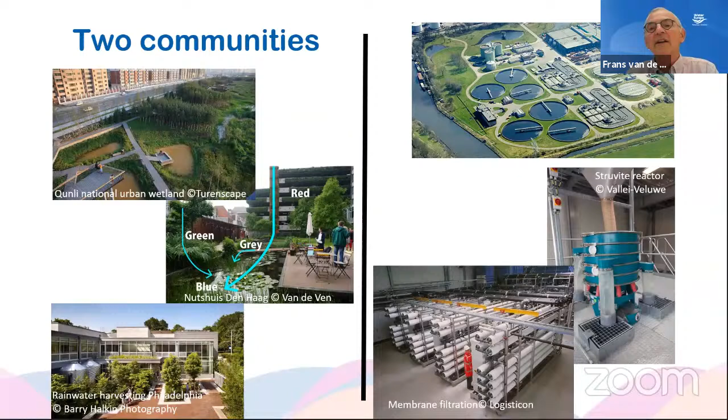The green people are working in the city, greening the city and making lively environments. The water technologists are working in water factories far away from the city; no one knows what happens there. It's behind a fence, well protected, and that characterizes the two communities. One is led by landscape architects, etc. They work in the city with very visible, decentral, multifunctional, opportunistic solutions, whereas the engineer tries to optimize the performance of each solution. Facilities invisible behind gates, often monofunctional, cleaning wastewater, producing a specific type of wastewater if possible.

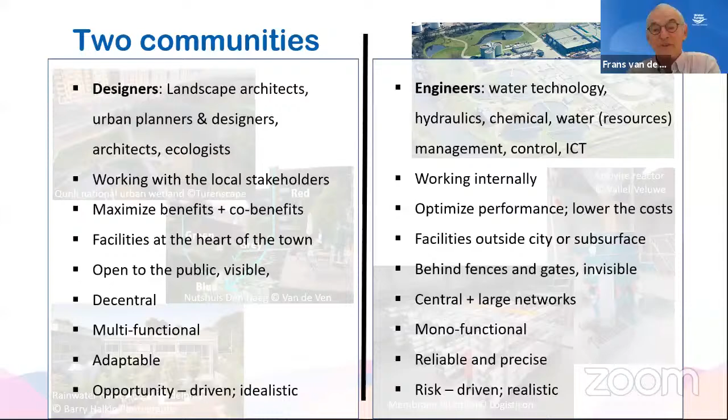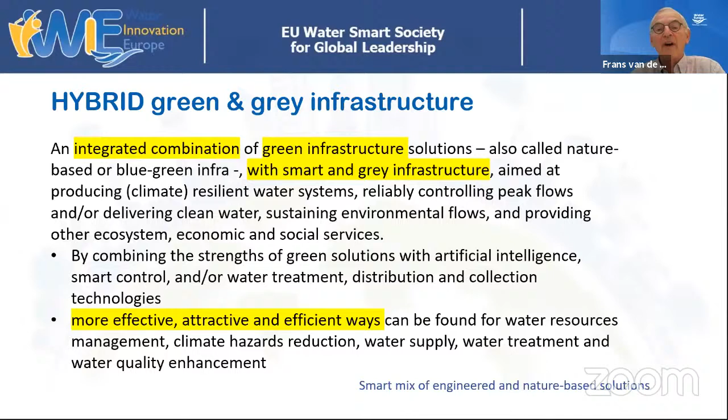Two different communities, and we think that the world could benefit from an integration of these two, an integration of green infrastructure with gray infrastructure, with the gray water technology solutions, but also with the water smart solutions, as is the topic of this Water Innovation Europe theme, Water Smart Society. All this to define a more effective, attractive, and efficient way to deal with our water resources and to provide services to our community and to the ecology.

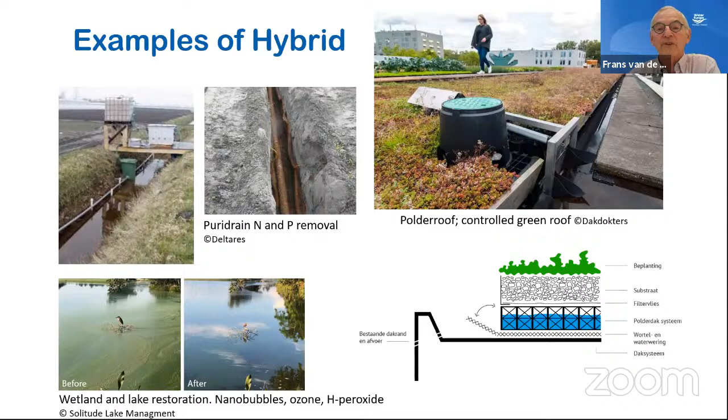And a couple of hybrid solutions, and we'll see more of that. The Puridrain, the upper left corner, Stefan Janssen is going to talk about that. But okay, we will see more examples in the presentations. And our conclusion of the white paper was, well, we can do better. We can do better by optimizing the synergy between nature-based solutions, water technology, artificial intelligence, monitoring, control technique, and integrate that in one solution, rather than doing treatment trains. Even try to integrate that in one solution.

However, this requires new roles for the existing players, for the utilities, for the water authorities, for all the others involved, for the spatial planners. It also requires learning by doing, because we have to experiment and learn a lot from innovative solutions. It also requires new governance, new spatial arrangements. And to that end, it requires targeted research and development, targeted R&D, and that needs money, of course.

If you want to talk about how to achieve this, well, we identified this according to the Symbiosis readiness level. Many people know the technology readiness level, but there's also a Symbiosis readiness level that identifies 4 characteristics, and that is technology, or the ecosystem, the network of cooperating organizations, the management, and the business character of the solution.

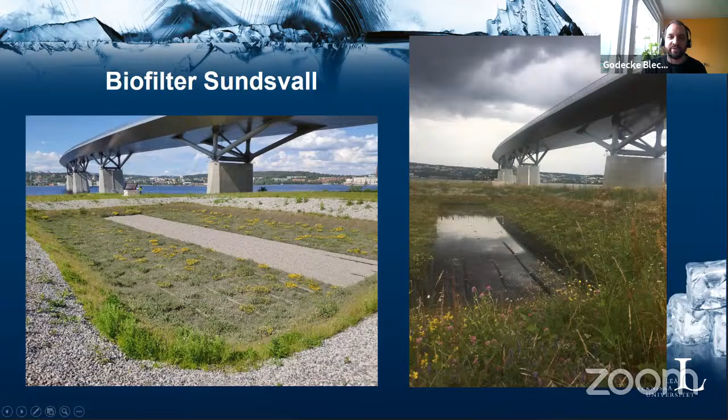And the runoff from this bridge deck is treated in this bioretention facility. As a first pre-treatment step in this facility, we also have a concrete pre-sedimentation facility. This is how the facility looks during dry weather, and during wet weather you see that there's water standing there, and the water infiltrates through the system and is treated by different processes in the filter material. And as I said, before it reaches this system, it passes through the pre-treatment facility, which is this gross pollutant trap.

And the design was done by our university together with this Mid-Sweden Water company, with Sundsvall municipality, and with the National Swedish Road Agency, who's responsible for all national roads in Sweden. So that was done jointly. So this is a quite good example of a collaboration project where we from academia already came in early in the design process to gain as much as possible from the system and to use the opportunities which these systems provide.

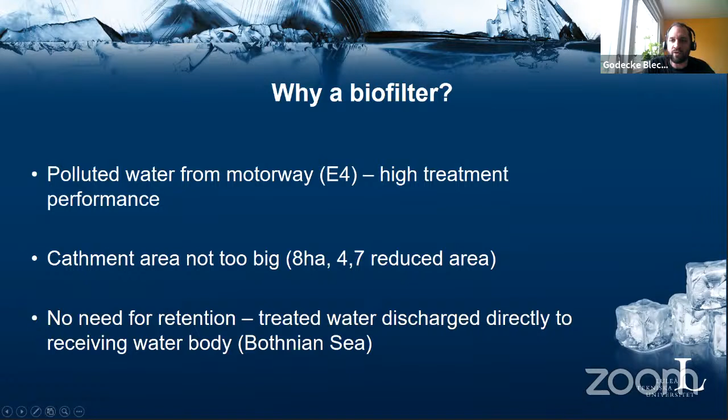Why this facility? The polluted water from this motorway has to be treated before it's discharged to the receiving water body, which is a bay of the Bothnian Sea, so the northern part of the Baltic Sea. There was no need for retention of high flows or flood protection, so it was mainly the water treatment, because the water from the bridge does not contribute to high flows or flood risks downstream, because it goes directly to the sea there. And the catchment is about 8 hectares, and it's 4.7 hectares impervious area, and that is mainly the road area and a motorway exit.

In total, the system was quite expensive. That was nearly 1 million euro. However, that was not due to the system only. It was also because the soil on site was a contaminated soil. So some measures had to be done, and that was a major share of this total cost. So that's why this is really expensive. But the system itself was cheaper. But this is one of the slides which Anna Maria was supposed to present. I cannot tell you exactly how much the system itself was.

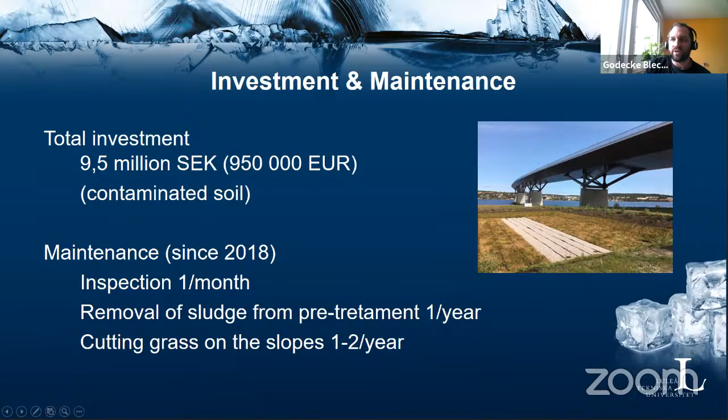The system was financed by the Swedish Road Agency when they built the bridge, because they own and operate the bridge. But then they have a contract with this Mid-Sweden Water company, and they are responsible for the maintenance and operation of the system. They maintain the pre-treatment system, cut the grass, and do inspection of the facility. And the system was built about 4 years ago.

We are currently doing a range of research projects connected to this facility. We look, for example, on different pollutants. We know that these systems work quite well when it comes to most total metals and so on, phosphorus also in this case here, total suspended solids. But we also look on other pollutants. Microplastics is something which is a bit in right now. So we've looked at microplastics and have a paper under review on that. We look on a range of organic pollutants, and then we also go a bit more into detail.

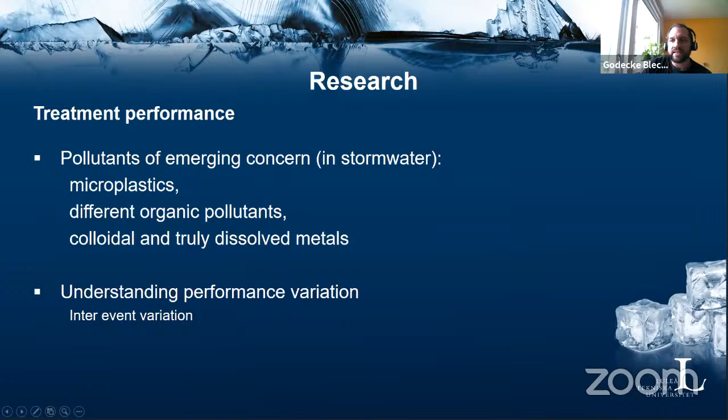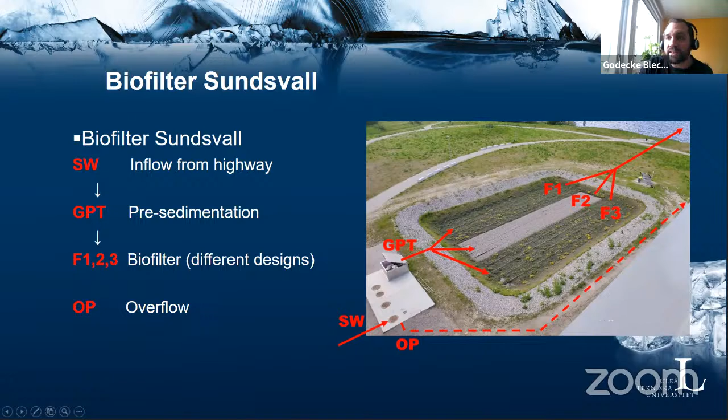What we also do is look on how the performance varies between different rains, but also within the rain. Partly we have quite high first flush events out of the filter. So these are topics which are quite interesting. Another point which I forgot to put on this slide is that we also have the opportunity to measure the stormwater quality, then after the pre-treatment step, and then after the filter section. So we can basically look on this treatment train and see the different steps. We cannot just look on the system as a big system, but also quantify the contribution of these different treatment steps. So that is the research we are doing.

Then I want to come to this Symbiosis readiness level. And here I must admit that I first had to read what SRL is. And I hope that I understood that. If not, sorry for that. But when I looked on this table, where we are, then in general, these bioretention systems, I would say, are on a relatively high level. We know that they, in general, perform well, that they can treat, for example, total metals well. We know how they should be maintained and so on. So in general, I would say that is an established technology.

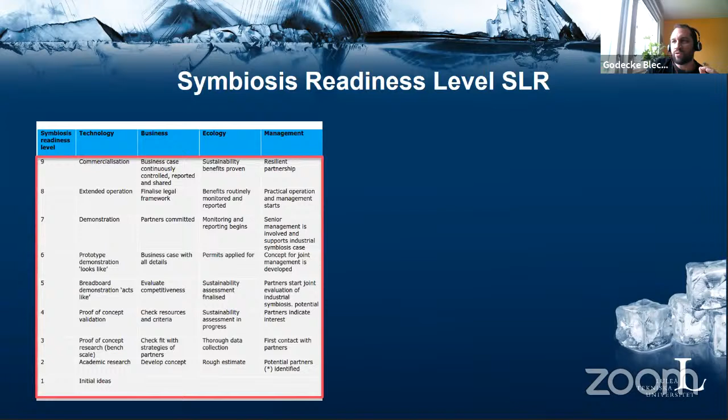However, when it comes to, for example, many organic pollutants, specific pollutants of emerging concern, microplastics and so on, there we still face many questions, and there we really need to learn more. I was at a meeting some time ago, and there it was said that we work with low-tech facilities when we talk about nature-based solutions. But these nature-based solutions are not low-tech facilities; they are very complex facilities because they involve many different design features, like different filter materials, inflow, overflow, vegetation, and so on.

We have many different biogeochemical processes, varying ambient conditions, different designs, and so on. I think while we know these systems relatively well as a black box, we have to know more about understanding this complexity and see how these different design features and ambient conditions work, and how different pollutants of emerging concern are treated.

Another thing which I think is very important is that we look more at field and long-term tests, because many studies have been done in lab, small scale, and short-term settings. But it's very important that we understand how these systems really work in reality, how we translate results from lab work into the field, and how they perform in practice. We've done some work on that.

Unfortunately, it is sometimes a bit depressing to see how these facilities work in the field. They do not work automatically or per se; we really have to design them correctly. I think sometimes there's a misunderstanding in implementation projects, an assumption that if we build blue-green infrastructure or nature-based solutions, they will be sustainable per se, that they will work automatically.

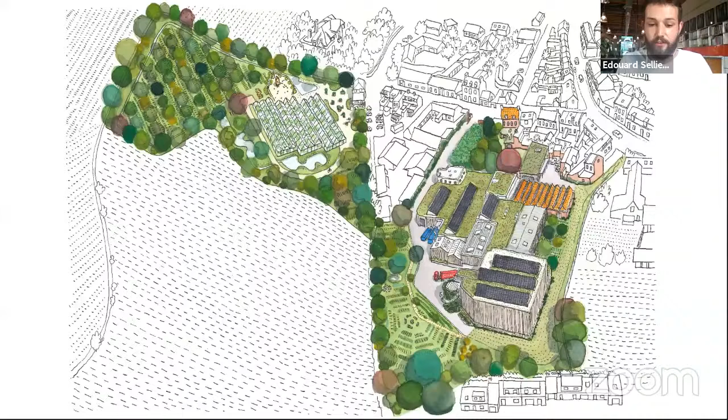As the Intergovernmental Panel on Climate Change, the IPCC, tells us that resources are running out, for the last 25 years in this company we changed all our old 20th century habits to new habits more respectful of our environment and its biodiversity. The water topic was a huge one for our industry, and I will explain why in the next few minutes. We developed in this plant a way of working we call ecolonomy.

Ecolonomy is a contraction of two French words, which mean economy, which actually means in English save money, and ecology, which means ecology, just like in French and English, are the same. We started to develop this new method of working, which permits us to save money while taking care of the environment.

When we looked 25 years ago from now on the working conditions in our factory, it started in 1997. The company was not doing that great. We had some issues related to the quality of our envelopes. Some customers got unsatisfied, and the board of the company decided to renew the boss of the plant, and a new boss came. His name is Emmanuel Druon, and he is still here today.

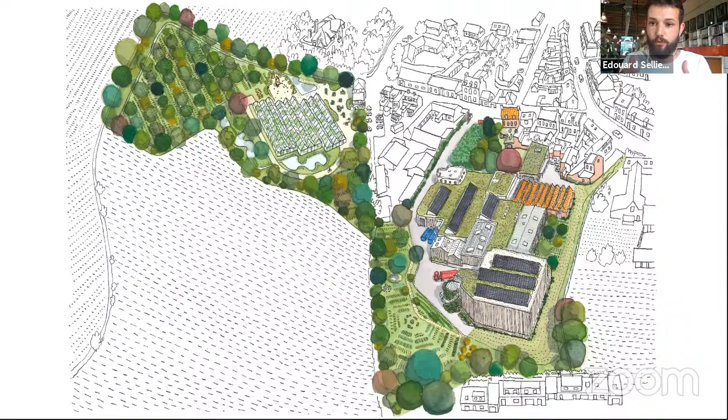Having simplified the recipe, we made some financial savings. In the end, we saved money on the cost of our ink because it was much simpler raw material. The composition of the raw material was way simpler than the old one. But we didn't stop there.

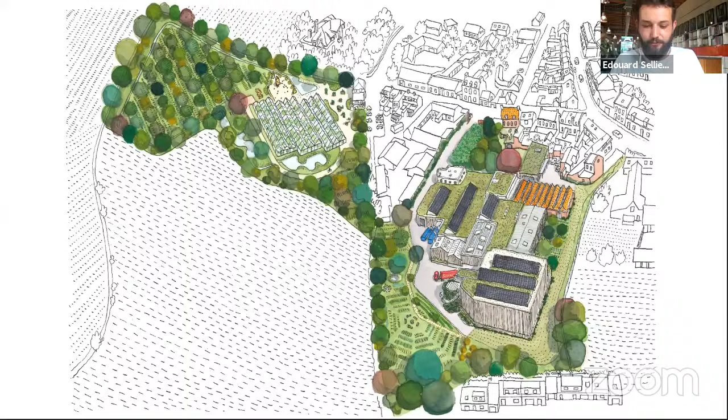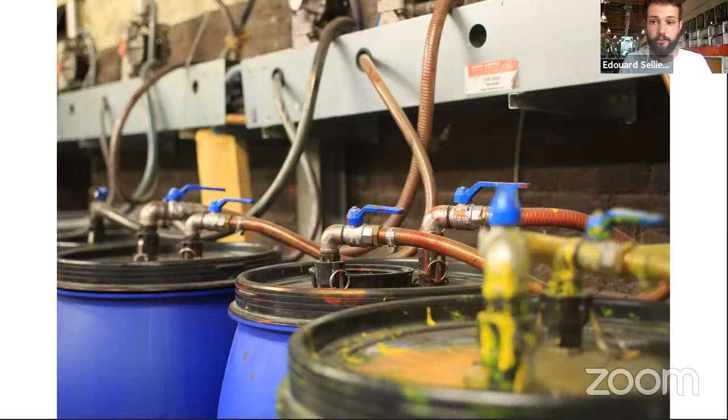When we received those new inks, we received them in 1 cubic meter water tanks, and in those tanks you had a little bit of pigment and a lot of water. So we decided to buy only smaller barrels of ink, around 200 liters, containing only the pigment, and we dilute it ourselves to make the ink. So we save money on transportation and CO2 on transportation. But we didn't stop there.

When we finish a production run of envelopes, we need to clean the machines with water, and these machines are dirty mainly because of ink. So when we used toxic inks 20 years ago, the wastewater we ended up with was toxic, and we had to send it to a wastewater treatment plant, which cost us 40,000 euros per year. Now our inks are not toxic anymore.

This is the next step, the last step. 10 years after installing the bamboos, we worked on our building and started redoing the roof. We developed a green roof, which was interesting for us because it permitted us to harvest rainwater quite easily. And now we are on a closed loop on water at Pocheco, because we harvest the rainwater coming from the green roof, and use it to make our inks and to wash our machines.

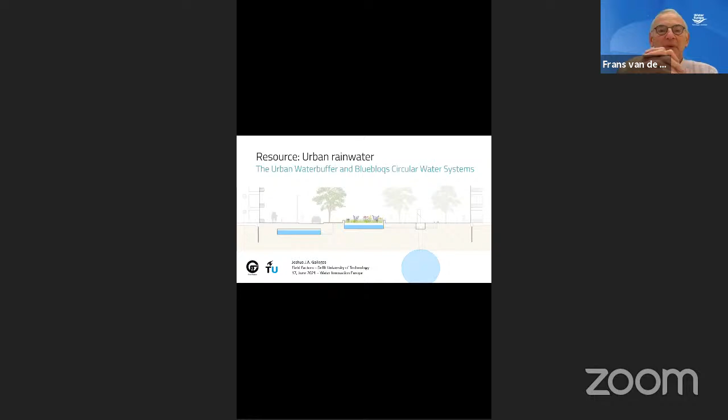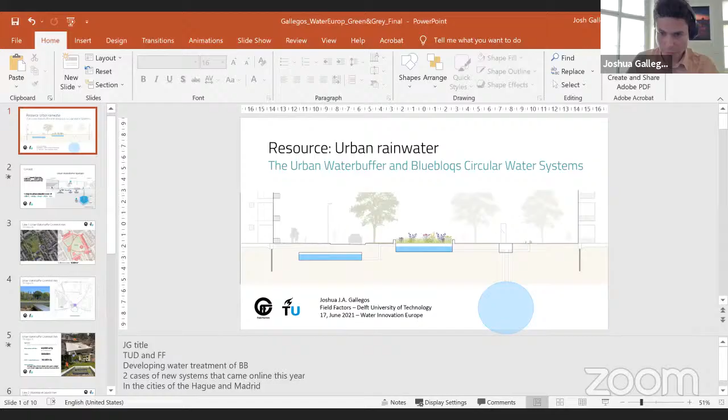Just bringing up my PowerPoint here. You have the full screen? Yep. That's to say, it's not a very wide screen, but we can read what's in there. I can read, it's not a very wide screen. I don't have it full scale. Maybe I can do one quick adjustment here. I have two monitors and it's constantly a fight with Zoom, so I'm taking one of them out. That should be better, huh? There you are, there you are.

Okay, good afternoon everybody. Again, my name is Josh Gallegos, and I'm working with TU Delft and Field Factors, which is a technology provider for the concept that I'm going to discuss today. The concept is called the urban water buffer, and in other ways we use the term blue-green circular water systems, and the purpose is making rainwater into a resource.

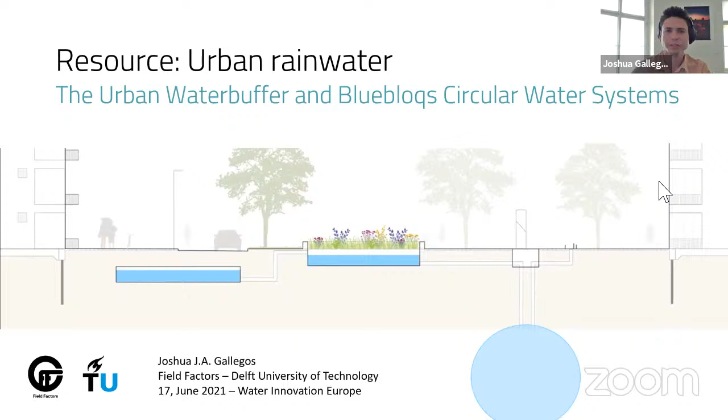So really valorizing large quantities of rainwater. Today I'm going to talk about two cases, one of which is in Holland and one of which is in Spain. The first case, which you can see on my screen now, is located in the city of Rotterdam, and this is the one Frans was referring to. The concept, in the first full-scale pilot, was applied to provide water to the soccer stadium.

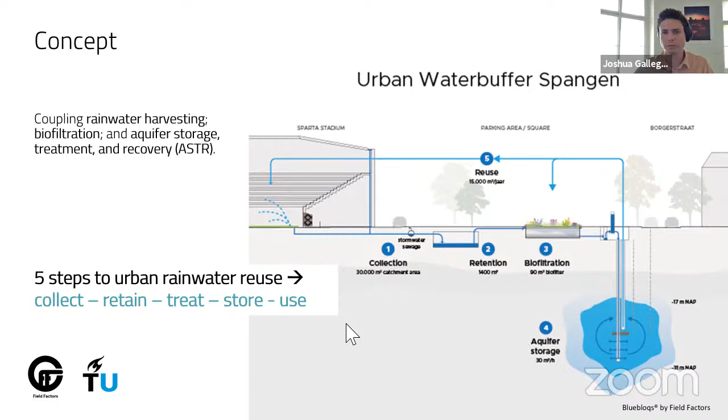What we do is combine rainwater harvesting, biofiltration, and aquifer storage, treatment, and recovery to essentially shift water from wet periods of the year to dry periods of the year. That happens through 5 steps. The first step is generally collecting water from surfaces, like rainwater harvesting, which is broadly applied. The second step is to retain that collected water in a retention tank, which is typically an engineered construction. I'll show you a few examples later.

The third step is to filter that water using a biofiltration system that's installed in the urban environment and also has aesthetic benefits. After that, we infiltrate the water into the deep aquifer, where we're able to store very large quantities. In this example, it was about 15,000 cubic meters of water recovered a year.

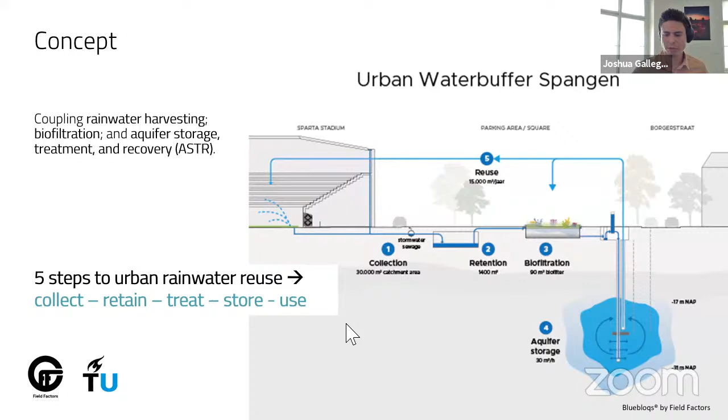Two cases that came on this year. We just finished commissioning an urban water buffer here in Cromvliet Park in the Netherlands, in The Hague. This was a city block scale installation.

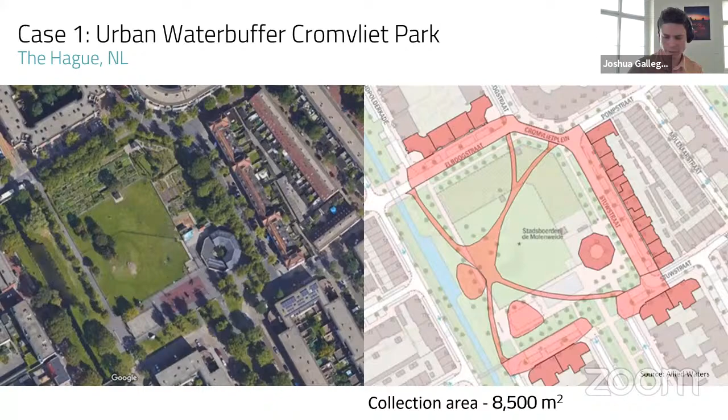You can see the pre-construction on the left side here. It's a large park with community gardens. A major renovation was done, and part of that was to disconnect this pink area from the existing drainage system that feeds to the municipal sewer, and turn it into a collection ring to supply these community gardens and an urban animal farm located at Cromvliet Park.

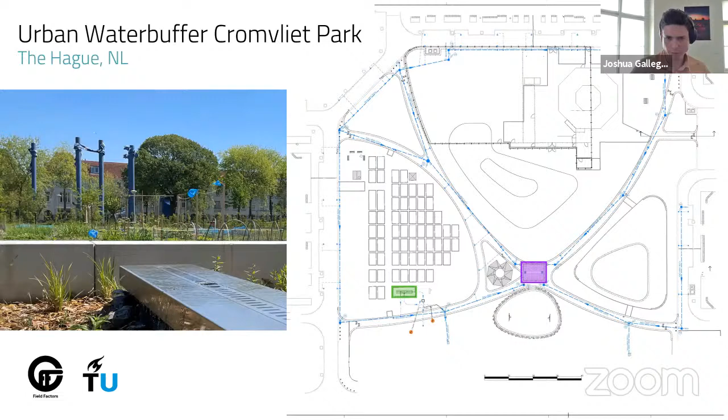From there, it goes to the biofilter on the left side of the screen, and then by gravity flows into an infiltration well, where it gets down to the aquifer and can be abstracted later using conventional means for use.

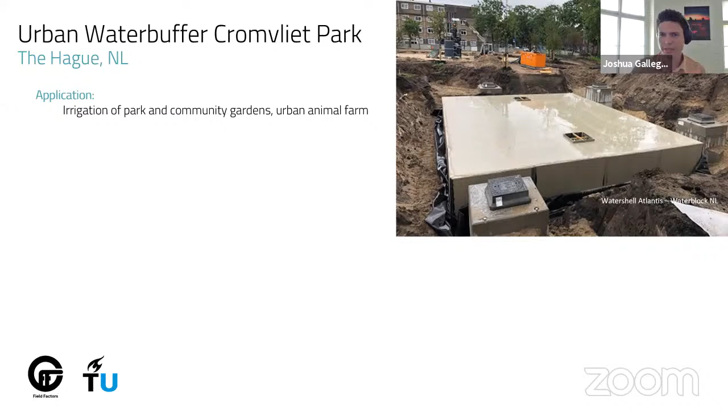One technology applied here was the Watershell Atlantis. This is the buffer system - a hollow body with a plastic skeleton inside to hold water. That's the initial collection, and the BlueBloqs biofiltration system with aerating distributors on the bottom.

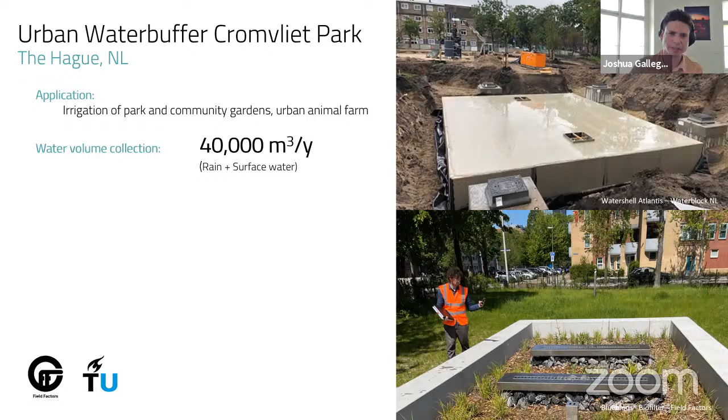The system here is estimated to collect about 40,000 cubes per year for use at the park. The investment, not including the drainage retrofit, so including technical installations, biofiltration, and buffer, was about 300K. Operations and maintenance is estimated at about 10 a year, mostly having to do with monitoring water quality. We're still doing a lot of research on the performance in that way.

The city of The Hague mentioned the major driver for selecting this solution was that they're looking for solutions that address multiple issues, and urban water addresses flood risk, the supply of water, and through that supply, urban cooling via green areas as well.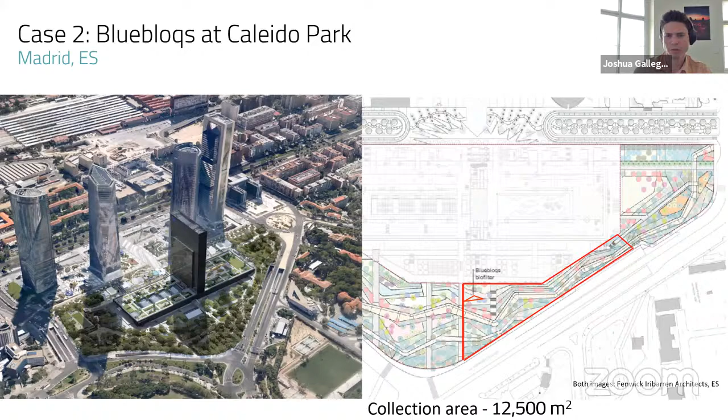Part of that was the construction of a municipal park, quite a vast area, as you can see in that picture. Within that park, you have multiple terraces and a large architectural water feature at the bottom. The application here was to collect rainwater to supply that architectural water feature, and also to provide ongoing treatment to remove, in particular, nutrients from it.

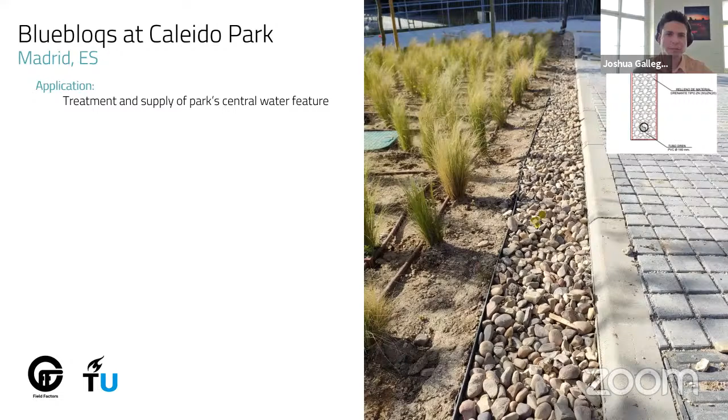In this case, there were what they call zanjas drenantes, or filter drains, installed on each of the terraces. Through the whole park, water is collected in these filter drains, which is a geomembrane filled with conglomerate, and a pipe at the bottom which channels all the water to the bottom level of the park, where we also installed a subterranean buffer, much smaller in this case.

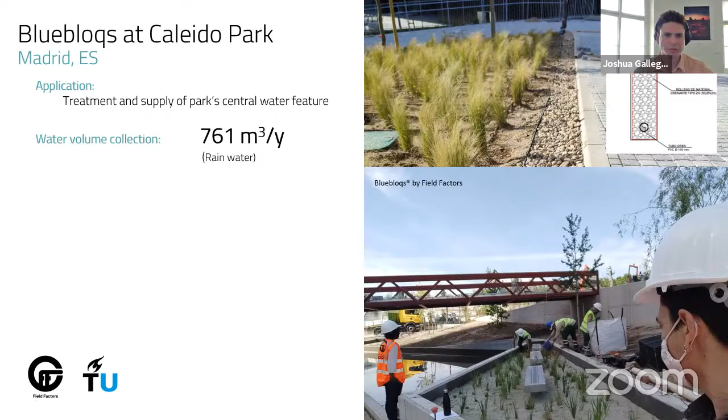That water goes through the Bluebloqs biofilter to get pre-treatment before entering the pond. Additionally, this pond water is cycled through the filter when it has sufficient water to maintain water quality. In this case, we're looking at a much lower recovery - of course, this is in the semi-arid climate of Spain, and we dimensioned the system accordingly to be quite a bit smaller.

The investment was about 120K, and again O&M was on the level of about 8,300, mostly having to do with needing to take consistent water quality samples and quantify performance on a number of aspects that the authorities in Madrid are interested in finding out more about.

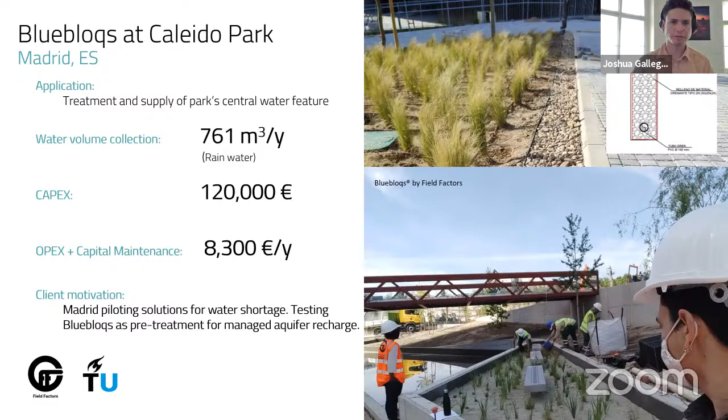When we move to this idea of symbiosis readiness level, I guess from the rubric provided by Sommer that you showed earlier, Frans, I think we're also somewhere around a level 7, and that's based really specifically on that chart. We have a large group of partners who are interested in the concept from different disciplines. We have demonstrators now in place, and more coming.

There's a lot happening with Field Factors, especially in the Netherlands right now, but other places as well. And we have monitoring underway for these systems, but there are, of course, a lot of issues that are still outstanding, and several of them you've touched on already, and Gotika as well.

The organizational arrangement for management: we run into a number of ownership issues. Maybe the municipality owns the filter, but the water company owns the water, and there's a sort of a gap about who actually can maintain a system when nobody owns the whole thing, and, frankly, who has the capacity to maintain the system in terms of understanding how it works. That's one thing we've been dealing with a lot.

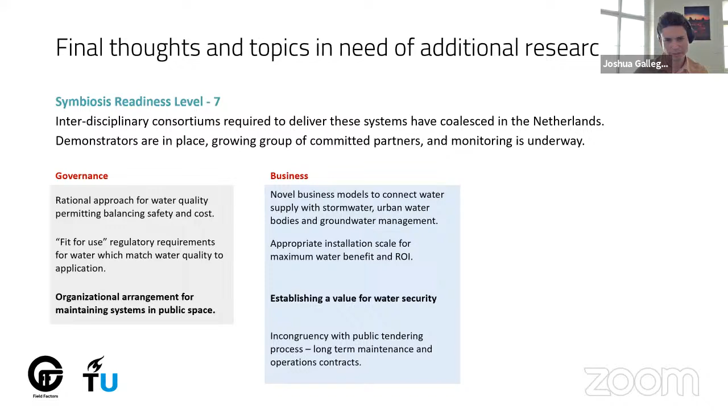Moving to the business side, it is still expensive when you're basing your return on investment on the savings of purchasing municipal water, which is very cheap, even in Madrid. And we think about establishing a value or taking an angle that quantifies the value of water security. So what is water worth when you don't have it? Sort of an insurance approach, which makes a lot of sense in terms of coming to some realistic numbers about what this water that we're providing is worth.

And finally, on the technical side, more the area that I'm working directly on now, there's a lot to be done in terms of optimizing treatment performance. So as Gotika mentioned at the first talk, there are a lot of very promising numbers associated with biofiltration and with properly installed and managed systems, but it's very easy to turn those numbers upside down when they're not managed in that way.

And so that's something that not only needs to be executed and runs into these issues of organizational responsibility, but also needs to be communicated clearly throughout the course of the project, especially after delivery, where people are thinking that we bought this thing, it's installed, and now we don't have to think about it anymore. That's just not the case. So there are a few other topics here maybe we can continue to speak upon, but that's what I had.

Right. Yeah. Thanks very much. Okay, so I'm sorry. I thought you were going to conclude the presentation.

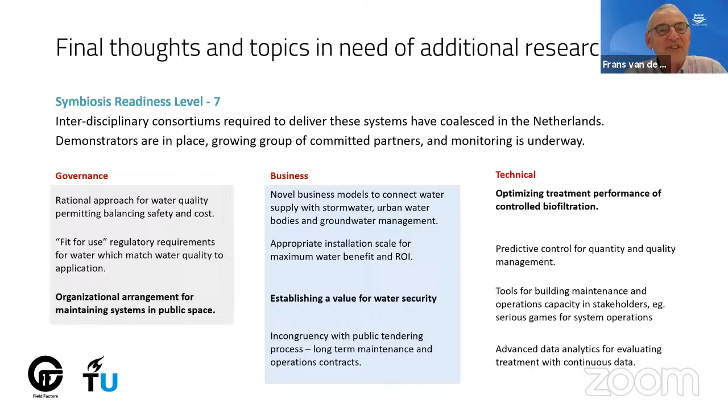There was a question in the chat, Josh: are you using first flush in these systems? First flush avoidance. Yeah, I suppose so. That is meant. Yeah, the first one, the Rotterdam installation, did have an implementation where the initial water would not enter the buffer tank, and that is something we think about. We're also elaborating, as I showed with the drainage ditches, various other pre-treatments that we can bring in.

I think one thing that's interesting to observe is when you get super local with the collection and you really are not allowing it to move through a lot of surface before you collect it, you see much lower numbers for a lot of pollutants than are regularly reported in literature. So that's been a win for us already. And from there, we're looking at how to optimize the removal of the most common pollutants that you see in stormwater.

Well, and then another question by Dominique Gattel: of course you have a natural filtration system. Do you renew this filtration system every so often? And how do you dispose of the biomass that comes out of the biofilter?

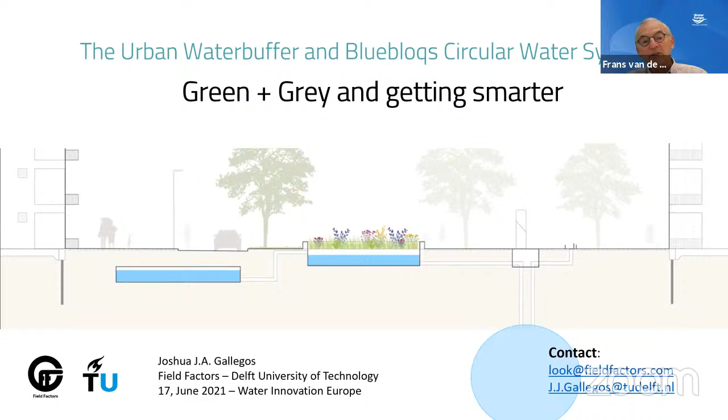Well, thank you, Josh. Thank you for the presentation. And I would like to move on to example number 4, which is not so much an operational technique, but more research into a solution strategy that could be operational, that could be used in integrating blue, green, gray technology: the Puri drain, as an example for expanding a drainage system with robust water technology to remove nitrogen and phosphorus.

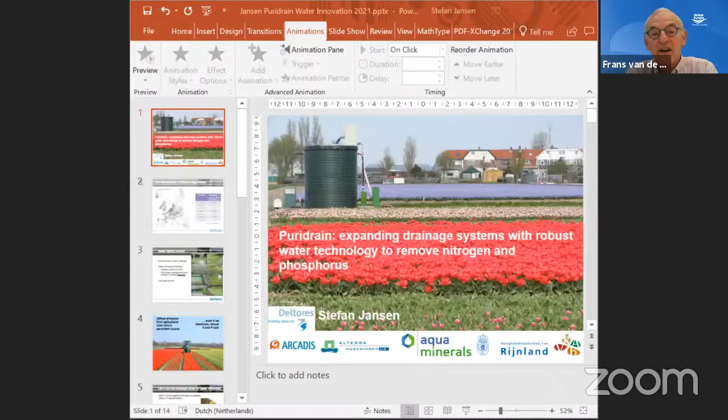A research project more in the rural area, but Stefan Jansen knows all about this, and he's going to explain that to us. And maybe this is interesting as a technique to be integrated in our nature-based solutions in one way or the other. But that's the big question. Stefan, go ahead. Yeah, thank you very much, Frans, for introducing me.

I think what I will tell has some nice links with what Joshua showed. The interesting thing is that he showed a nice example for a more urban environment, and I will show quite a similar philosophy actually for a more agricultural system. And we call it Puridrain, which is a combination of purification and drainage, which makes sense, of course. And the idea was to expand the agricultural drainage system with robust water technology to remove nitrogen and phosphorus.

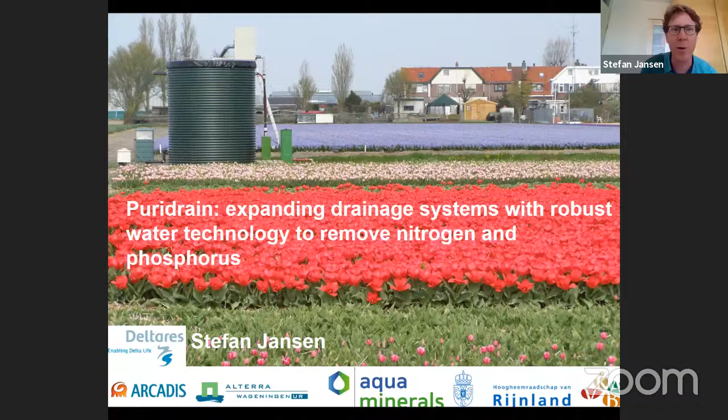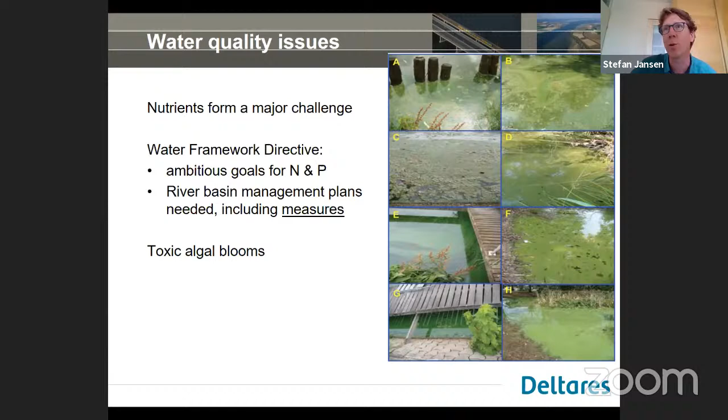But before I go into the examples, I will take one step back. Why did we do what we did? Well, the main incentive was water quality issues. As most of you know, nutrients form a major challenge there. The Water Framework Directive sets very ambitious goals for nitrogen and phosphorus, and river basin management plans actually mention that measures have to be taken. And one of the examples of outcomes of eutrophication is, of course, toxic algal blooms, which the picture shows.

Well, if you look at the Netherlands, one of the most persistent sources of nitrogen and phosphorus is diffuse emission from agricultural soils, which makes it very difficult because point sources are easier to tackle. And how can you tackle diffuse sources? And one of the other problems is that even if we drastically reduce N and P use right now, these diffuse emissions would go on for years. So we need a solution for this.

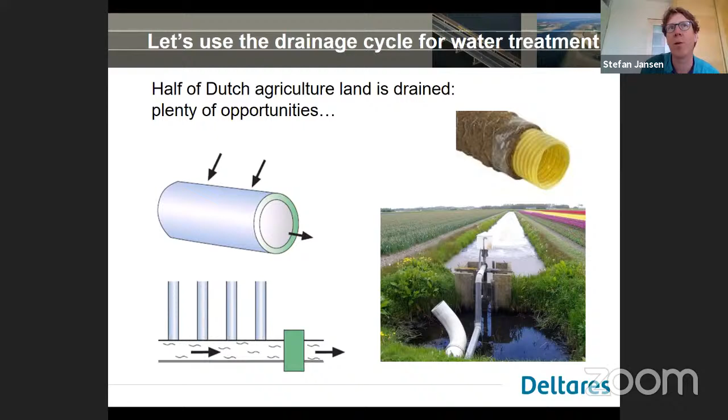And our idea was to look into the drainage cycle, which is already there. In the Netherlands, about half of the Dutch agricultural soil is drained. And this creates actually a sort of natural reactor system that you could use to treat the water. So our idea was to see how we can fit water treatment systems into this drainage cycle. And well, I will show two examples, one for phosphorus and the other for nitrogen.

For phosphorus removal, you need some form of chemical treatment. And we chose chemical immobilization using iron oxide coated sand. And this is a very nice material because it's a side product of drinking water production from groundwater. So the groundwater for drinking water is put over a sand filter to remove iron and other particles. And then iron-coated sand is formed. And it's low cost. It has a very strong phosphate binding, good permeability, and no side effects. So it's a very useful material.

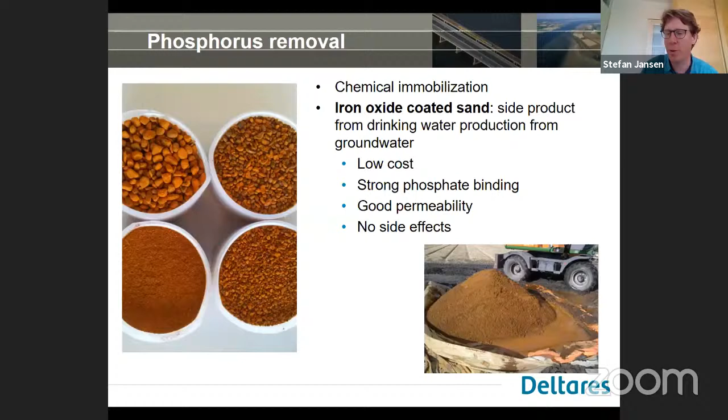And with this material, we did some field tests in the flower bulb area. It's a very nice region in the Netherlands where a couple of months ago, you could see very nice, colorful flowers. But there's a high amount of phosphorus in the groundwater there. So we need treatment. And we did a very nice project together with a lot of parties, including the Water Authority, farmers, several research organizations, constructors. Well, that was very nice.

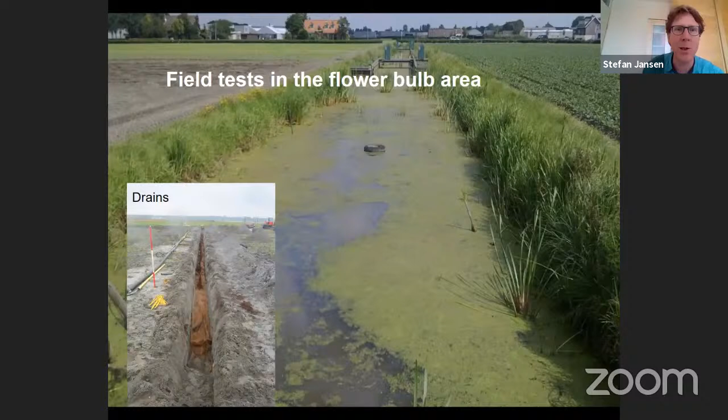And we tested 3 forms of treatment. The first one is to put the drainage tubes into a bed of iron oxide coated sand, like in the left side picture. The second one is to move away a little bit from the drainage in the soil and tackle the phosphorus at the point where the drains emit into the ditches by way of bed filtration. And the third option was to install a reactor, over which ditch water was filtrated.

Well, I will not go into the details too much, but I can tell that all of the 3 options did quite well in removing phosphorus. About 80 to 90% removal rates could be achieved. But especially the third option had some clogging issues, which makes sense if you try to treat ditch water, which contains a lot of particles. But especially the first 2 options are quite interesting, because the drainage water has already gone through the sand filter, so to say, and it can be treated quite easily.

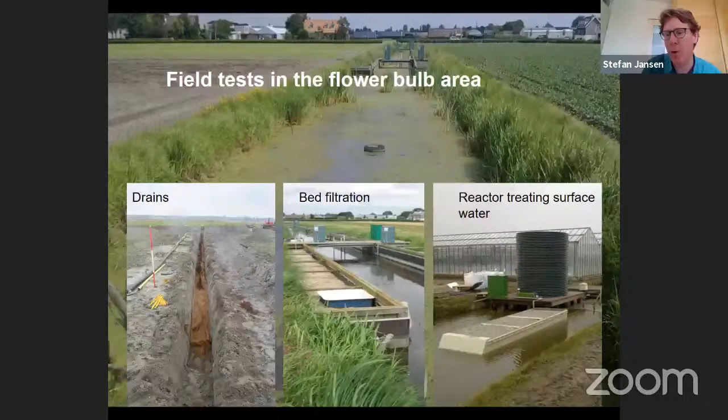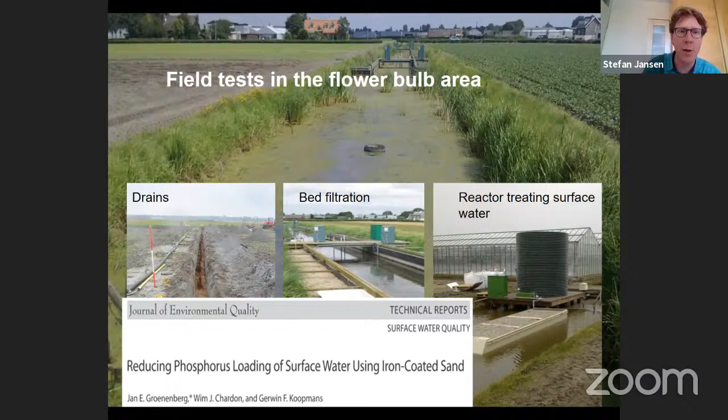And one of the advantages for the farmer is that it does not require land or other changes to his agricultural practice. So that makes it interesting for the farmers. Well, if you want to know more about this type of technique, there are also a couple of research papers out, which give more details. And well, I already mentioned some of the outcomes. Phosphorus removal rates could be achieved quite high.

And well, costs of maintenance and maximum lifetime change, of course, as you can imagine, for the different types of practical working. And apart from the technical and scientific results, I think the main challenges are more in other fields, including practical applicability. The farmers don't want to have large areas of the land being used for other things. So you have to find space. That's a very important issue.

The farms also don't want any obstruction of the drainage, because if a lot of rainfall is present, then the plants really should not be exposed to too high water levels. Another issue is the cost. Although these systems are not too high cost, it's always a challenge to find out who wants to pay for this.

And in this project, we saw that it is always good to have both the water authority and the farmers involved, because my idea is that if you have the two parties both willing to use such a method, then you have some way of doing it. And very important, that's why we like this practical project. You have to gain experience to make people believe in such a method, and also, if you can take people into the field and show it to them, it works best.

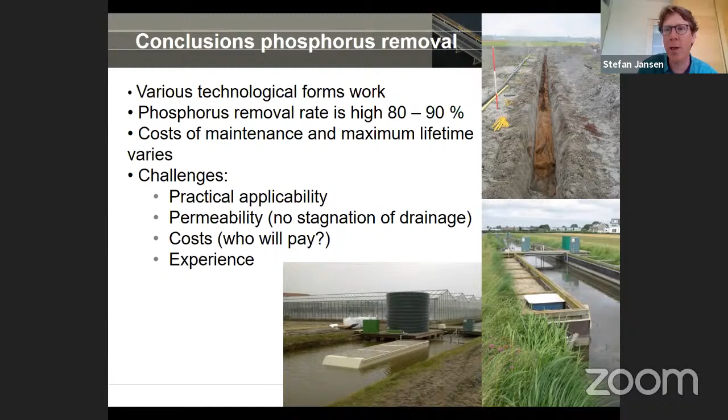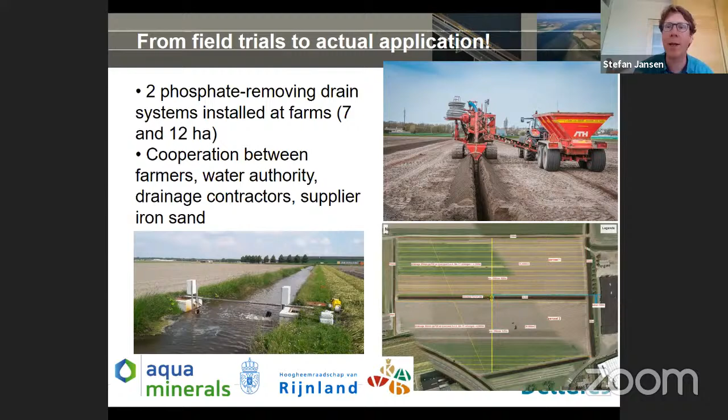That's also why we were really happy that we could scale up these options to a larger scale. So in 2018, two systems were installed at a farm scale of 7 and 12 hectares. And again, here there was this close cooperation between the different parties involved. And right now we are learning from these cases to find out more how it is behaving, and also to find out what form of structure works best.

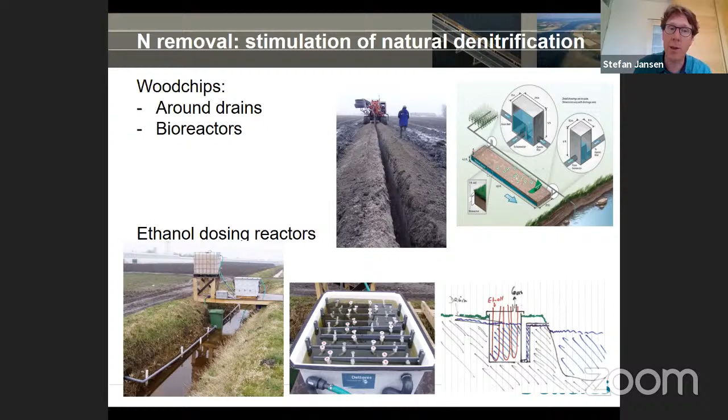Very briefly, I will touch upon also another form: nitrogen removal. It's actually a very similar way. It's also trying to find a method of removing it. And for nitrogen, you can use biological removal, either using wood chips around the drains or in bioreactors, or using ethanol in reactors. We did similar experiments there, and similar findings.

And to come to the final conclusions. What we saw in this project, we could achieve high removal potential for N and P with little to no interference with agricultural practice, which is a high benefit if you talk with farmers. And also what is very interesting is that you can use low-cost materials and very robust technology, which is important if you want to do this in an agricultural setting.

In terms of the technological readiness level, I assess that we are around level 6, so in the demonstration level. So it's not yet really at commercial level, but we are mainly now facing the challenge of really convincing parties that this is really a system that could be used in practice. And that's also where the challenges are: practical application, acceptance, cost, and also side effects.

And I think what is really essential is first practical demonstration. You really have to do it together with partners. And one final aspect is that you have to look for the incentives. We saw that these technologies had a lot of support, and there was a lot of interest in Water Framework Directive measures. So that helps. The other interesting thing is that we found out that the farmers in the flower bulb area were willing to invest themselves if they could apply more organic matter to the field.

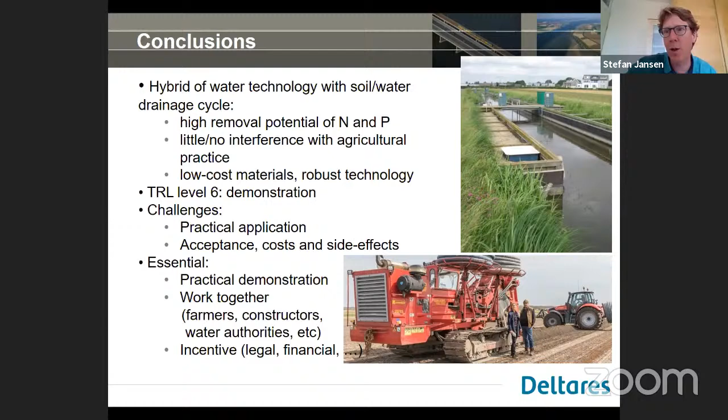And I think that may give some inspiration for alternatives instead of only legislation or financial incentives. Maybe you have to ask the clients what is important for them and why they would like to install such a system.